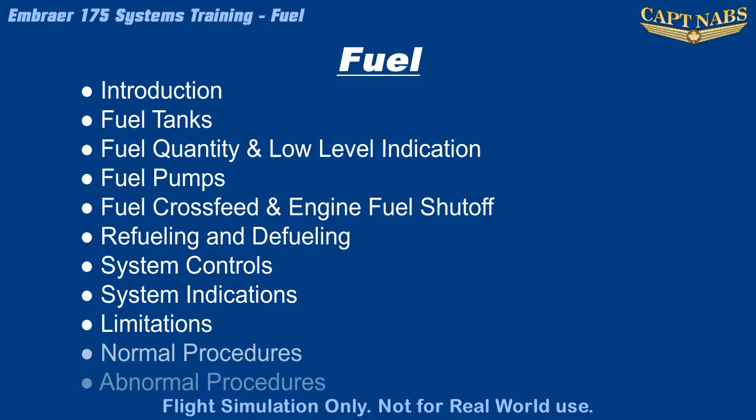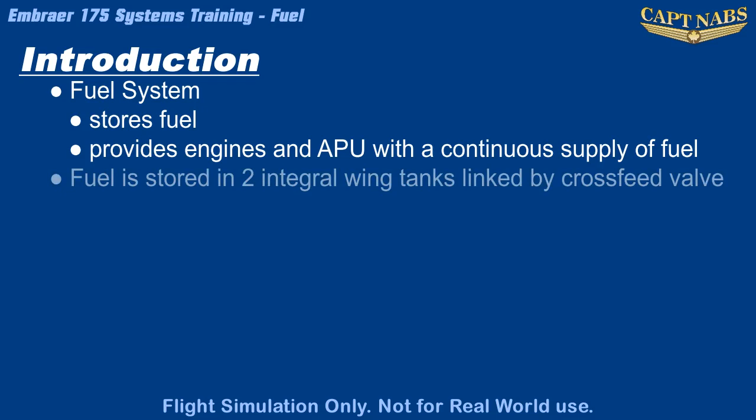The purpose of the fuel system of the Embraer E-jets is to store fuel and provide a continuous supply of fuel to the engines and the APU. Fuel is stored in two integral wing tanks that can be linked via a crossfeed valve. Additional plumbing provides tank venting and allows tank filling as well as ensuring fuel supply to the engines themselves. Overall, the fuel system is quite simple and is designed to operate fully automatically without pilot input under normal conditions.

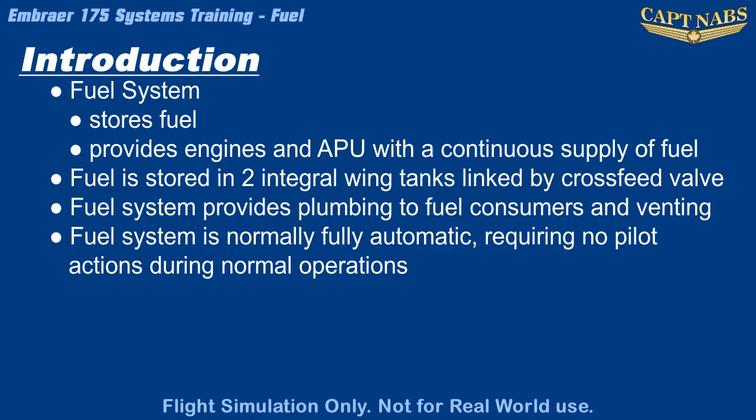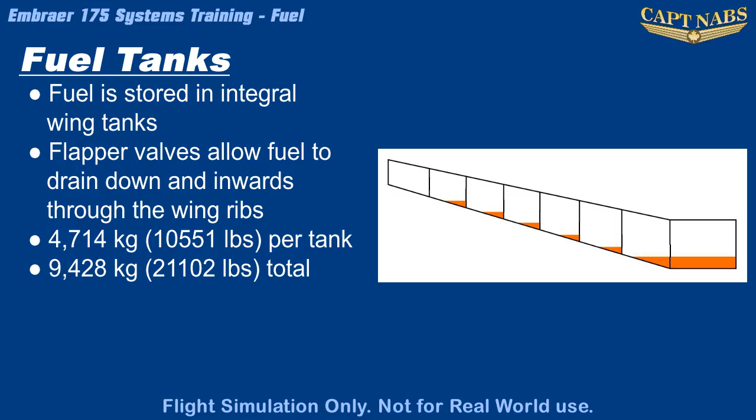Fuel in the Embraer is stored in an integral tank in each wing. Fuel flows through the tank between the ribs that frame the wing's shape. The ribs help partition the fuel in the tank to prevent fuel from sloshing around, and flapper valves within the wing ribs permit fuel to flow downhill towards the wing root as fuel is consumed. The maximum quantity of fuel within each tank is 4,714 kilograms, or 9,428 kilograms total between both tanks.

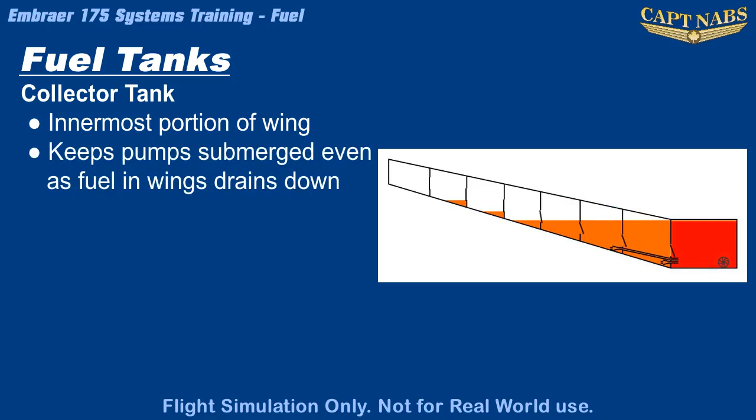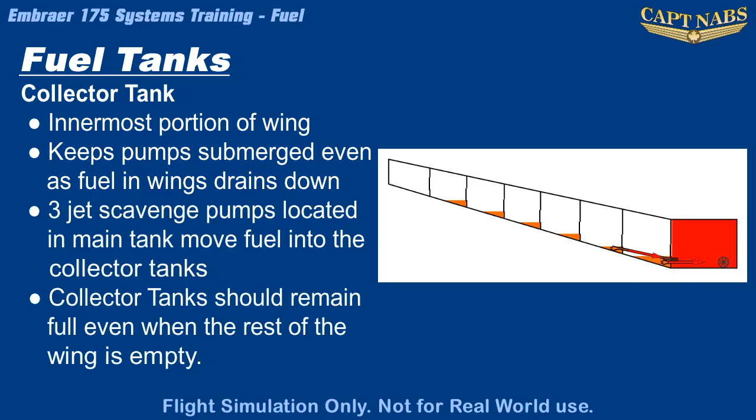Within each tank are several specific compartments, a collector tank and a surge tank. The collector tank is the innermost area within the wing tank. It is designed to keep the fuel tank pumps always submerged in fuel, even as the fuel level in the wings overall falls below the level of the pump. 3 jet scavenge pumps located in the main parts of the fuel tank gather fuel from the main tank and move it into the collector tank, ensuring the collector tank remains full even when the rest of the tank has been drained. The surge tank is an extra tank outboard of the main portion of the fuel tanks.

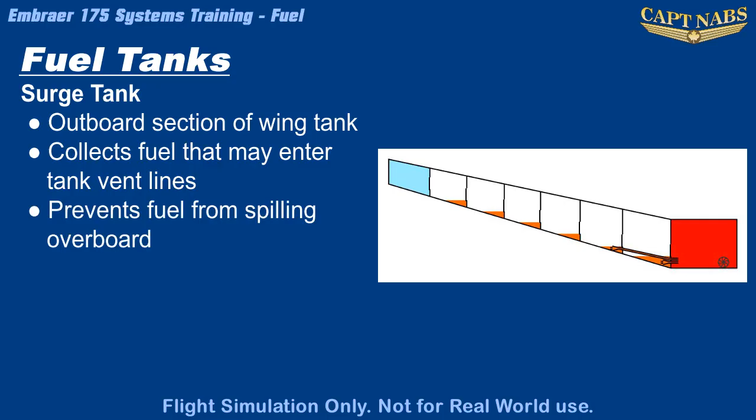It collects fuel that may enter the tank vent system during wing down or other uncoordinated maneuvers. This helps prevent fuel spilling overboard. This fuel can then drain back down into the main tank through flapper valves as fuel in the main tank is used up.

A vent system ensures air can enter or leave the fuel tanks as the fuel quantity changes and also as the outside air pressure changes. This prevents structural failure from excess pressure differential between the inside and outside of the tanks. The vent lines run along the top of the tank, linking various tank sections together with the surge tank. The surge tank is then vented from the top to the outside atmosphere through NACA anti-icing vents. The vent lines are sufficient for all normal operations, but an additional high-capacity pressure relief valve is also provided to prevent overpressurization in case of line blockage.

2 water drain valves are mounted at the low points in each tank where water will collect, as the water is heavier than fuel. Each tank is designed to normally feed the engine on its corresponding wing, with the APU being fed from the fuel line in the right tank.

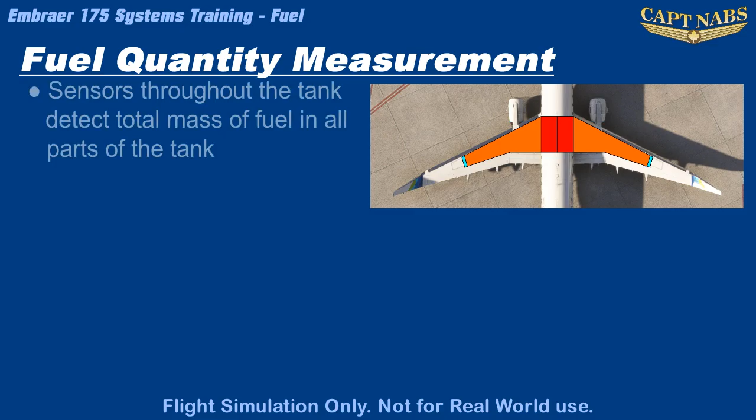Normally, fuel is measured through a series of sensors located throughout the tank that can detect the total mass of the fuel within the tank. This information is transmitted to the EICAS to be displayed as a fuel quantity. The quantity is accurate to within 2% of the indicated value plus 0.75% of the total tank capacity.

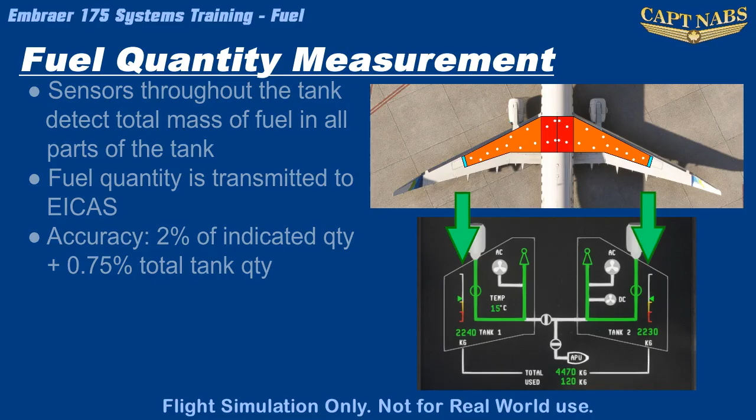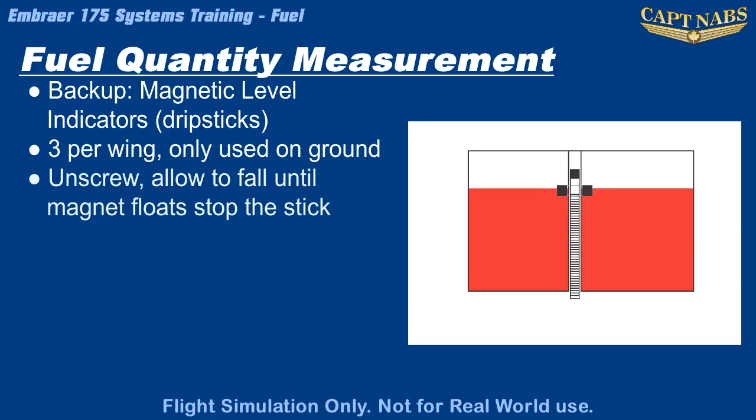In case of failure of the electronic quantity measurement system, 3 magnetic level indicators, also known as dripsticks, are mounted within each wing. These can be used while on the ground to determine the level of fuel in the tanks. The indicator is unscrewed and allowed to fall freely until stopped by magnets floating within the tank. The level is then read where the stick protrudes from the wing and translated into a quantity using a table provided in the AOM fuel servicing section.

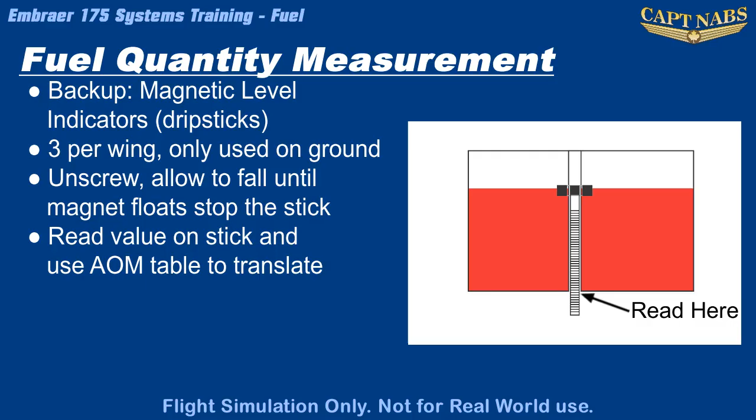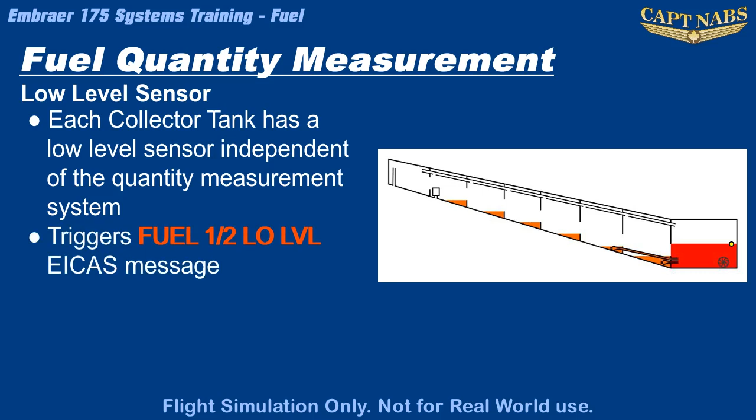An additional independent low-level sensor is installed in each collector tank. This sensor is independent of the fuel quantity indication system, and when the fuel falls below the level of the sensor, the fuel low-level EICAS warning is triggered for the corresponding tank. Under normal conditions, this sensor is activated when the fuel level in the wing tank is approximately 300 kilograms.

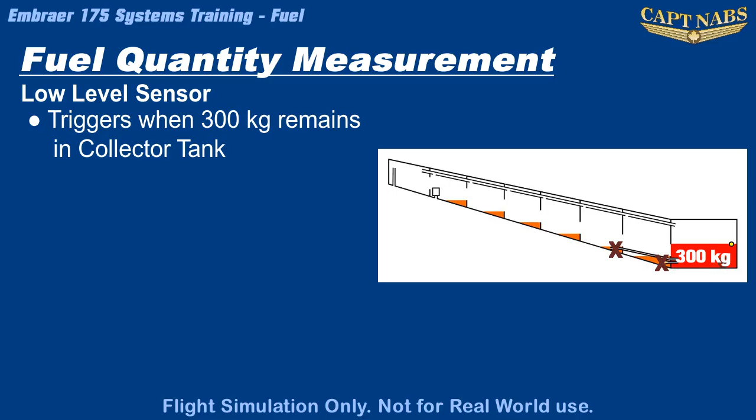Under normal conditions, the scavenge ejector pumps would make sure that all of this remaining 300 kilograms is in the collector bay. However, if some or all of the scavenge ejector pumps are not working due to a malfunction or a lack of return fuel pressure during an engine failure, there will be much more fuel left in the tank outside the collector bay. In this case, the fuel 1-2 low-level warning will trigger with up to 1,800 kilograms still in the tank. If this has occurred, it is possible for the engines to flame out due to a lack of fuel being delivered from the pumps.

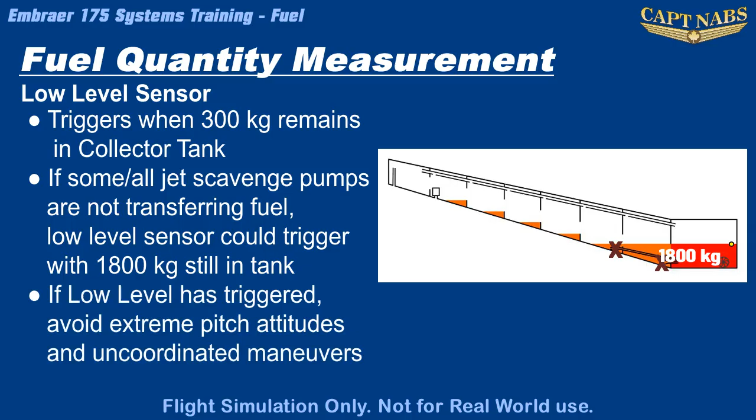If the aircraft exceeds a pitch of 15 degrees nose up or down, any uncoordinated maneuvers, or negative Gs.

Several different fuel pumps move fuel around the system to maximize system reliability. These include one ejector fuel pump per wing, 3 scavenge ejector pumps per wing, one AC electric fuel pump per wing, and one DC electric fuel pump in the right tank only.

The ejector fuel pump is the primary pump that transfers fuel from the collector bay to the engines. An ejector pump is a simple system with no moving parts. It is basically a venturi: a small volume of high-pressure fuel returned from the engine's high-pressure fuel pumps passes through the venturi. The high speed of the fuel decreases its pressure, and this lower pressure sucks a larger quantity of fuel from the tank into the venturi, carrying this high volume of low-pressure fuel to the engine. This simple design requires no electricity, ensuring a continuous supply of fuel even in the event of electrical failures.

3 more ejector pumps, called scavenge ejector pumps, move fuel around the wing fuel tanks. They function in exactly the same manner as the primary ejector fuel pump and are powered by the same high-pressure fuel being returned from the engine. However, the function of the scavenge ejector pumps is simply to move fuel from low areas in the main parts of the wing tank into the collector bay. These pumps ensure the collector bay is always full of fuel, even as the rest of the tank level drops, ensuring the primary ejector pump and the electric pumps always have fuel, even when the aircraft attitude changes.

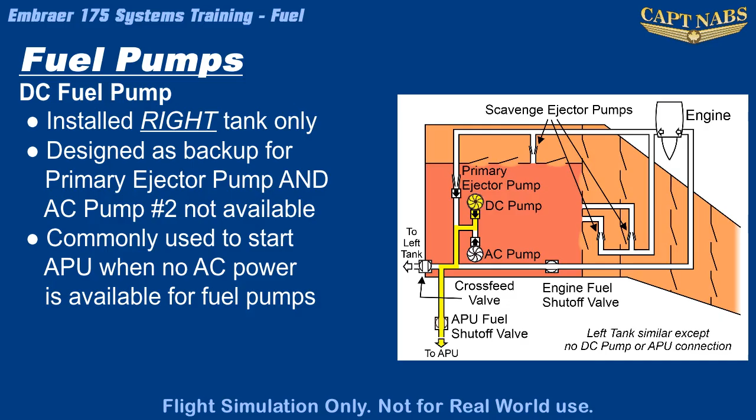A DC fuel pump is installed in the right tank only. It is designed as a further backup in case the ejector fuel pump is not available, for example the engine is off and no AC power is available. The most common time the DC pump runs is to start the APU when no AC power is available and only DC battery power is available. However, the DC pump could also be used to start an engine if an AC pump is not available, though its output is smaller than the AC pump output. The DC pump is powered by DC Essential Bus 2.

Normally, the fuel system is separate for each side of the airplane. However, crossfeed does link the two systems after the ejector fuel pumps and electric fuel pumps. The valve that links the two sides of the system is normally closed, but can be opened to feed both engines from a single tank when necessary to correct a fuel imbalance, especially during single-engine operations.

When the crossfeed knob is selected to the Low 1 position, the crossfeed valve opens and AC pump 2 is activated to increase the pressure coming from the right number 2 fuel tank. This will force more fuel from the right tank through the system to both engines.

Since the fuel pumps always supply more fuel to the engines than necessary, some of the fuel will be returned by the engine to its respective tank, and the fuel level in the low tank will actually rise very slowly. For example, if engine 1 is being fed from tank 2, the excess fuel from engine 1 is still returned to tank 1, so tank 1's level will actually rise slightly.

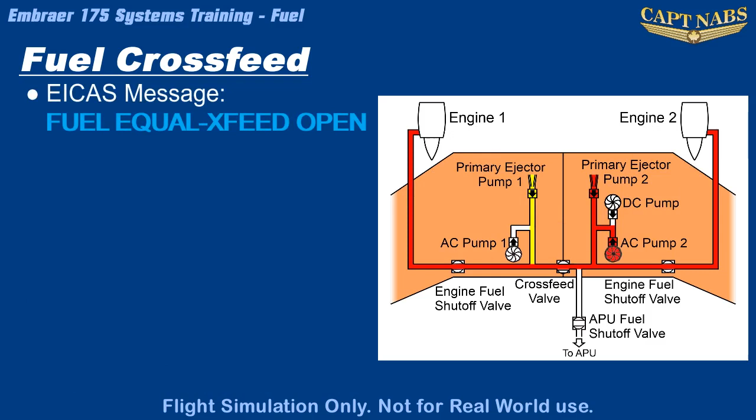Note that an EICAS message, fuel equal crossfeed open, will appear anytime a fuel crossfeed is commenced before the fuel imbalance message is triggered. This message is information only, but serves as an important reminder, as fuel crossfeed can introduce an imbalance beyond limits after only a few minutes if it is not carefully monitored.

The engine fuel shutoff valve is located within the wing, in the feed line from the pumps to the engine. This valve is only closed by pulling the engine fire handle. Since the valve is in the wing, when it is closed during an engine fire scenario, no fuel can enter the wing nacelle area at all.

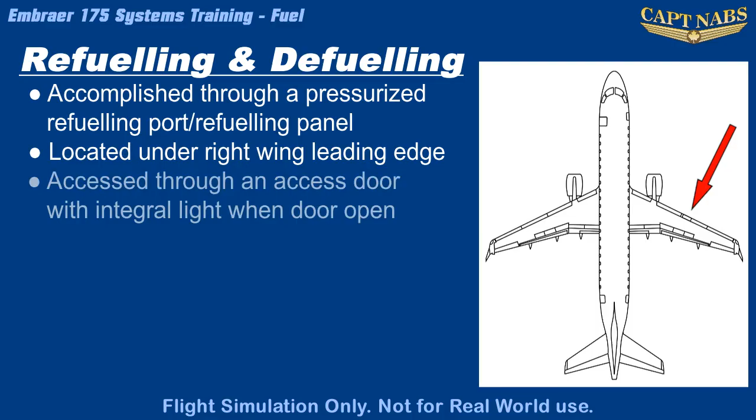Refueling and defueling is normally accomplished through a single pressurized refueling port, located on the refueling panel underneath the leading edge of the right wing. An access panel protects the refuel panel and maintains wing aerodynamics. When the panel is opened, a light illuminates automatically to assist in night and low light operations.

Power to control the refueling system can be provided by DC bus 1 and 2 if the aircraft has AC power available, or the hot battery bus 2 if the aircraft is unpowered.

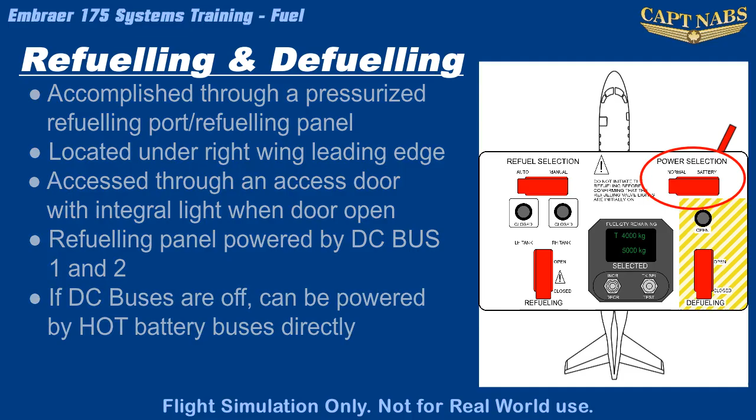Fueling is controlled by a fuel control unit, or FCU. Normally, refueling is conducted in auto mode. In auto mode, personnel pre-select a desired fuel quantity to fill the tanks on the refueling panel.

In this mode, the FCU opens the refuel shutoff valves and monitors the fuel quantity throughout fueling. When a tank has reached a level equal to half the total desired fuel, the FCU closes the tank's refuel shutoff valve. This ensures the correct amount of fuel is delivered and balanced equally between both wings.

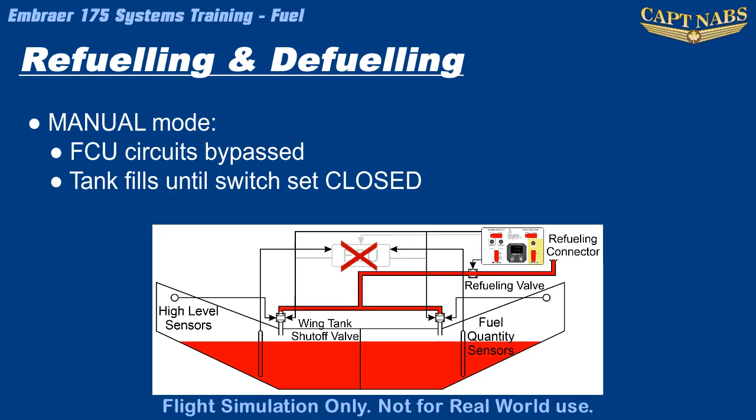In manual mode, the FCU is bypassed. As long as the refueling switch is open, the refuel shutoff valves also remain open. Personnel must manually move the refueling switch to closed when the desired fuel level is reached to close all the refueling valves.

For either mode of pressurized refueling, a high-level shutoff trigger will close the refuel shutoff valves when the fuel in a given tank exceeds the maximum volume. This is indicated by the valves closing and a STOP L OVER or STOP R OVER message appearing on the refueling panel display.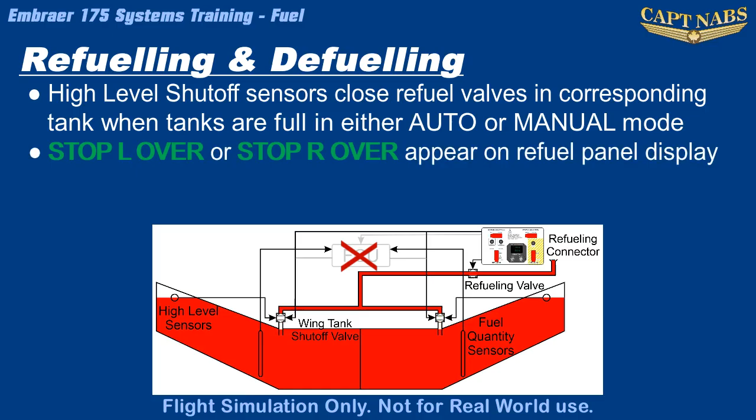Note that it is possible for this high-level shutoff to trigger prior to reaching the nominal tank capacity of 4,714 kilograms. This would usually occur on a warm day when the fuel is less dense, as the high-level shutoff triggers when the tank reaches full volume, regardless of the actual mass of the fuel in the tank.

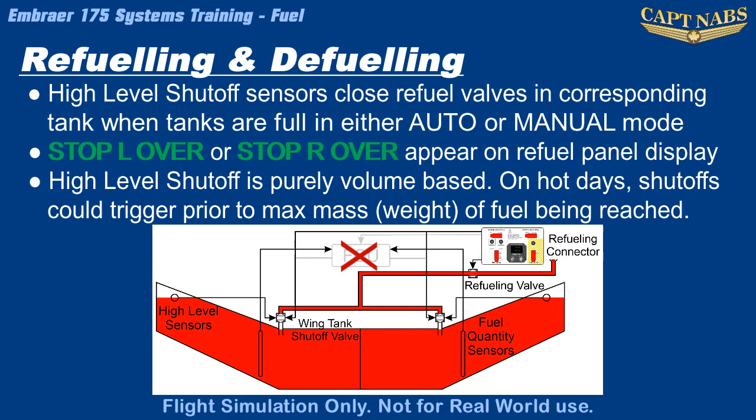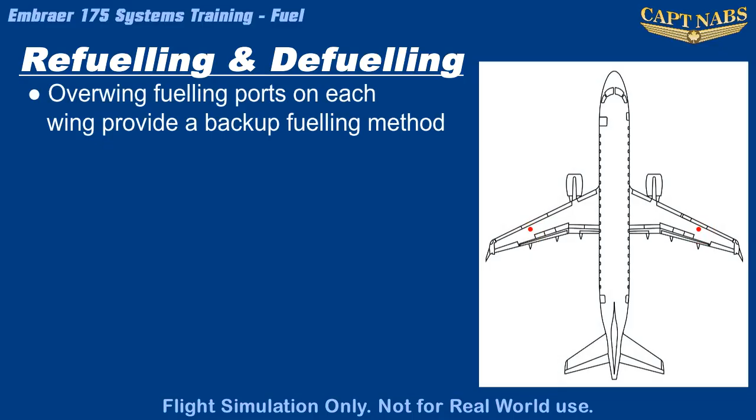It is not possible to bypass the high-level shutoff through pressurized refueling. As a backup, the aircraft is also equipped with a single over-wing refueling port on each wing. However, these are seldom used in reality.

The aircraft can be defueled, if required, through the same refueling panel. A defuel switch allows fuel from the tanks to exit through the pressure refueling port, and this can be achieved either through suction from the defueling vehicle or with the assistance of pressure from the aircraft's fuel pumps.

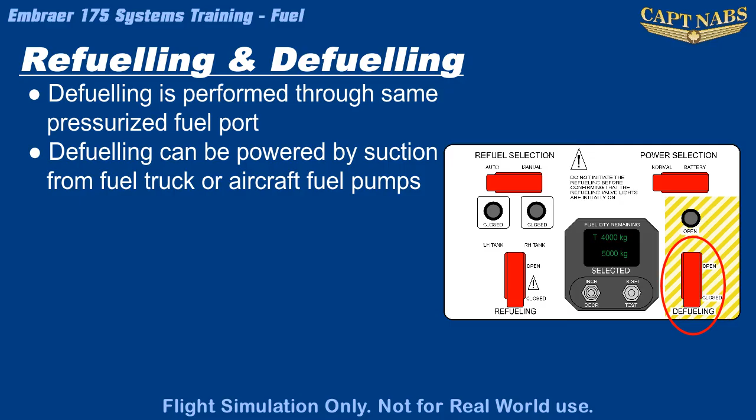The fuel system is primarily controlled from the fuel panel on the overhead panel. This panel is laid out in a diagram which basically resembles the layout of the key components of the system. As you will see, the controls are very simple and, under normal operations, are not operated by the pilots, as the system is fully automatic.

At the bottom of the panel are two AC pump switches, for pump 1 and 2. Normally, these are left in auto mode at all times. The pumps will be activated automatically by the system when needed.

This includes during engine starts, anytime pressure from the ejector fuel pumps is insufficient, during APU operation for the right AC pump, and during a crossfeed operation, where the source tank pump will operate to boost pressure from the source tank.

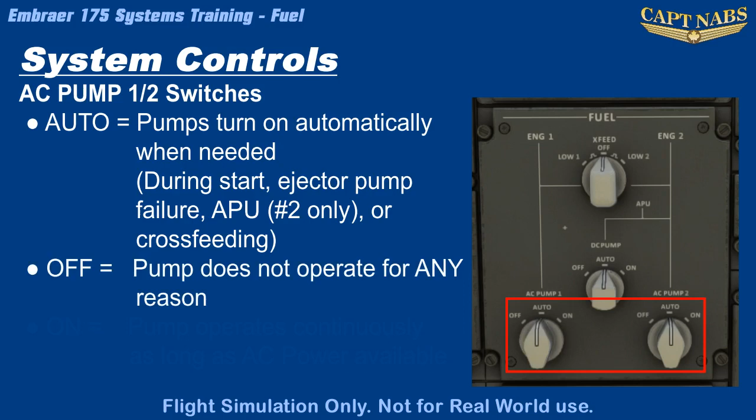In off mode, the AC fuel pump will not operate for any reason. In on mode, the AC fuel pump will operate continuously until another switch position is selected or AC power is removed.

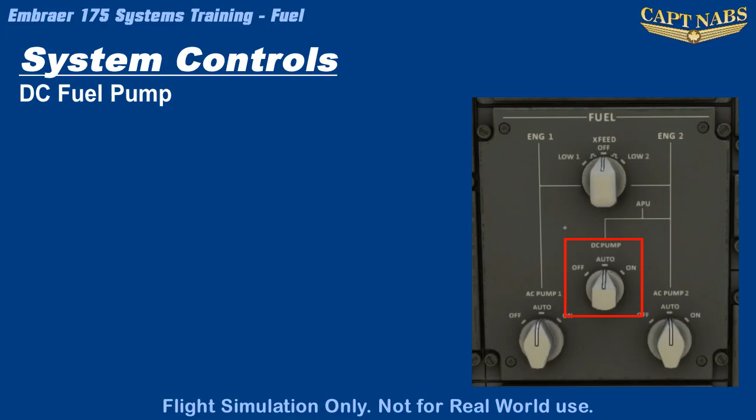A DC fuel pump switch in the center of the panel works in much the same way as the AC pump switches. In auto mode, the DC pump will be activated when fuel pressure is required from the right tank and AC power or AC pumps are not available.

This is primarily the case for APU starts from batteries. The off position prevents the DC pump from operating for any reason, while the on position forces the DC pump to run continuously.

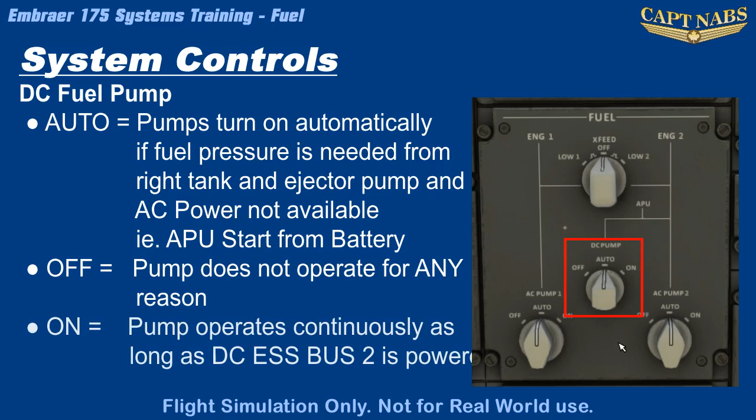At the top of the panel is the crossfeed selector. Normally it is in the center off position, where the crossfeed valve is closed and no crossfeed operation takes place.

The low 1 position is used to provide crossfeeding where tank 1 has a low fuel level. For low 1, the crossfeed valve opens and the right AC pump is activated, assuming it is in automatic mode. This increases pressure output from tank 2, forcing fuel from tank 2 into both engines and ensuring its level drops faster than tank 1.

When low 2 is selected, the crossfeed valve again opens, but this time AC pump 1 is activated, reversing the process.

The other controls for the fuel system are located on the refueling panel underneath the right wing. The refueling switch controls the position of the refueling valve behind the pressurized refueling port. Open, the port is opened and refueling can commence. Closed, the refueling valve is closed.

Above the refueling switch are two lights that indicate the status of the refueling shutoff valves. When the valves are closed, the lights illuminate.

Above this is the refueling mode selector, which is normally guarded in auto mode. In auto, the refuel shutoff valves close automatically when the pre-selected fuel level is reached in the tank.

In manual mode, the refueling shutoff valves remain open as long as the refueling valve is open, unless the high-level shutoff triggers to close a refuel shutoff valve.

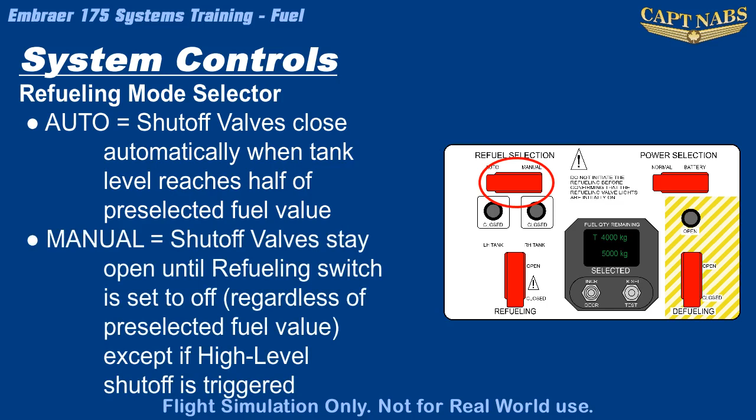The power selection switch allows personnel to select a power source for refueling operations. In normal, guarded mode, the refueling system operates off the aircraft's electrical buses, specifically DC Bus 1 and 2. However, if aircraft power is not available, battery mode can be selected. In this case, all the refueling system runs off battery 2 through the Hot Bat Bus 2. Be sure not to leave the switch in battery mode when refueling is complete to avoid excess drain on the batteries.

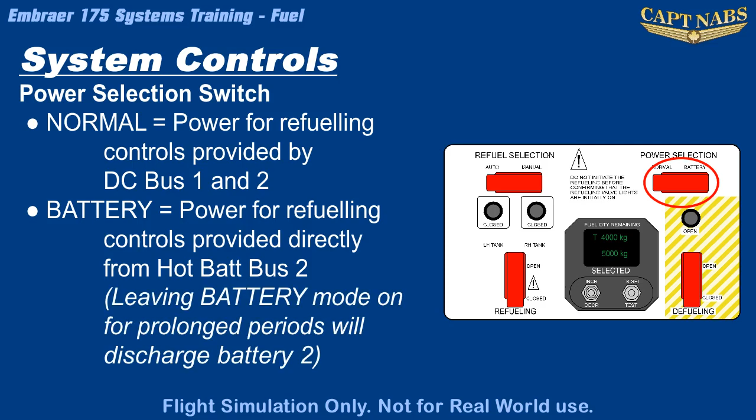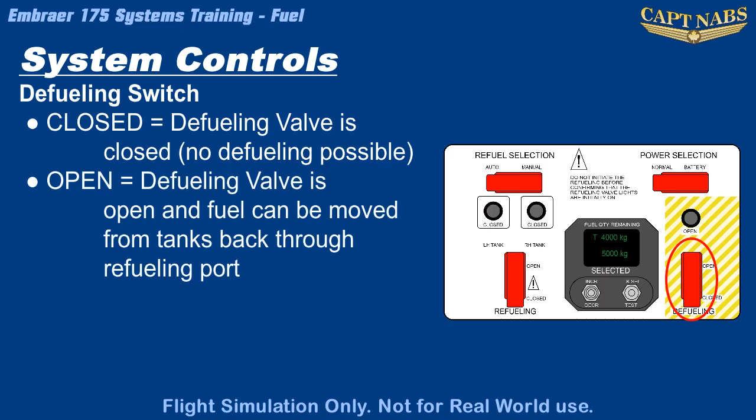The defueling switch has two positions. Closed, the defueling valve is closed. Open, the defueling valve is opened, and fuel can move from the tanks back through the refueling port to allow defueling. The defueling light will also illuminate while the valve is open.

The display shows the fuel quantity in the tank on the top line and the pre-selected fuel quantity on the bottom line. Moving the increase-decrease spring-loaded switch will increase or decrease the pre-selected fuel quantity. The other switch on the display is used to control and test the display and is also spring-loaded.

Selecting Tank Sel cycles the upper line of the display. When first powered on, the upper line shows the quantity in both fuel tanks, indicated by a T for total. Pressing Tank Sel once displays the left wing fuel quantity with an L. Pressing it again displays the right fuel quantity with an R, and pressing it again will return you back to the total fuel value. Pressing the test position will test the display system to ensure all the display segments are working correctly.

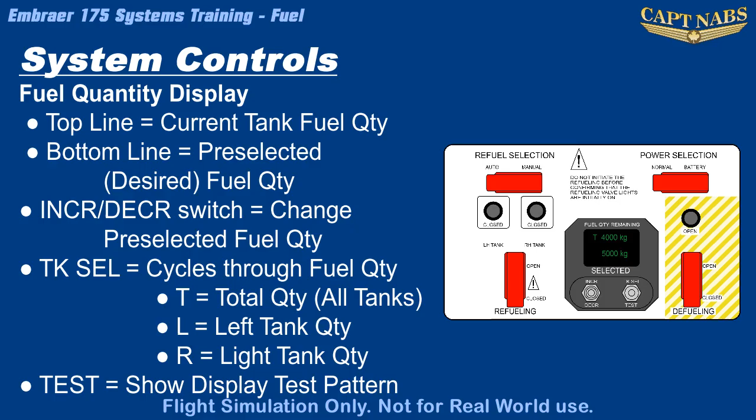It is worth noting an important safety feature of the refueling panel. The guarded switches are in their normal or safe for flight position when the guard is closed, and the design of the access door is such that the door cannot be closed and latched if any of the guards are not in their correct guarded position.

As with most systems on the Embraer, the status of the fuel system can be monitored on a dedicated fuel synoptic page on the MFD. The quantity of each tank is indicated on each tank, both numerically and with an arrow on a tank level scale. The scale indicates a normal, white range, an amber caution range, and a red, low fuel range. The color of the digital readout will also change, with green for normal, amber for caution, and red for low fuel. The total fuel quantity for both tanks is displayed at the bottom of the screen, along with a fuel used indication, and the quantity will change colors in line with the tank indications. The fuel used indication reflects the current flight and resets when the first engine is started.

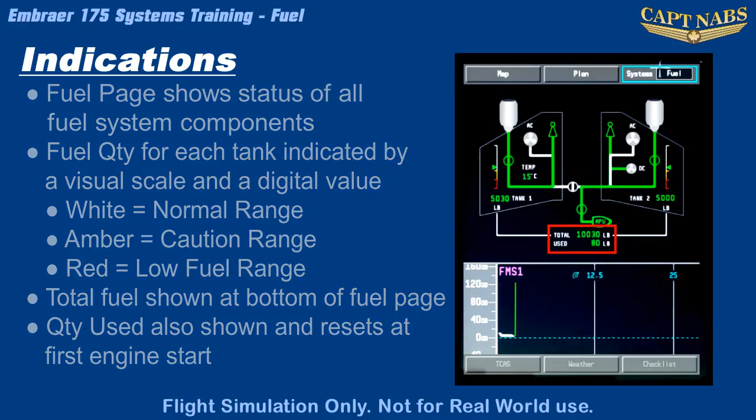Fuel lines are shown linking the various components of the fuel system. The lines display either white if no fuel pressure is present, or green if pressurized fuel is present in the line. This green-white convention also extends to the fuel valve and pump symbols. Note that it is normal for fuel pressure to be low enough to not register and thus be shown as white when engines are still on, but they are running below 60% N2.

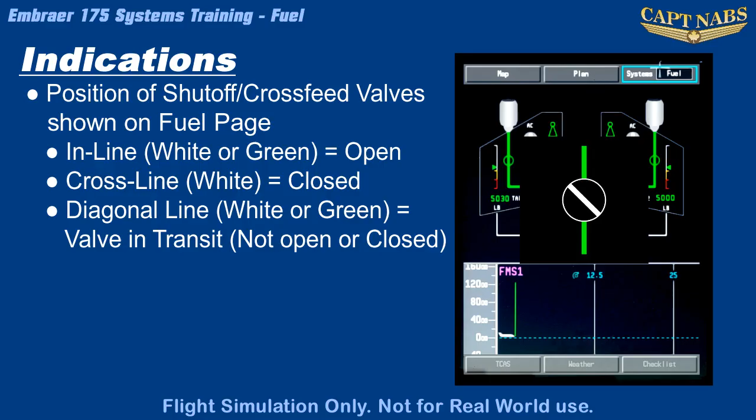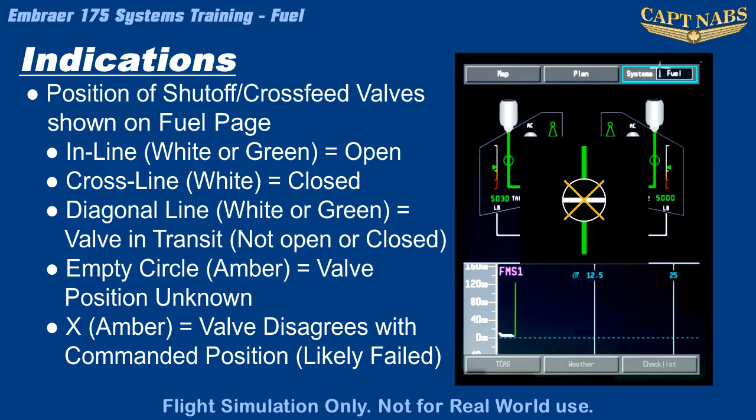The status of all the fuel valves in the system is shown on this screen: the engine shutoff valves, the APU shutoff valve, and the crossfeed valve. A valve that shows an inline flow line is open and may be either green or white depending on fuel pressure. A closed valve will show a cross-line flow that will be white. A diagonal flow line indicates a valve that is in transit, neither fully open nor closed, and may be green or white. An amber circle with no flow line at all indicates the position of the valve is unknown. And a valve with a amber X over it indicates a valve that is open or closed as shown, but its position is not in the commanded position, and it is therefore likely failed in that position permanently.

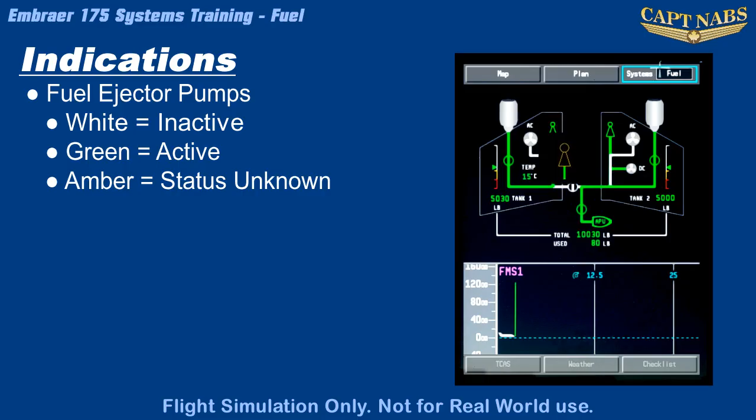All the electric pumps are shown using similar conventions. A pump with a green windmill is on, and a gray windmill indicates off. An amber windmill indicates a pump whose status is undetermined, and an amber X over the pump symbol indicates that the pump is not in the commanded setting and is either failed on or off as indicated by the green or gray windmill.

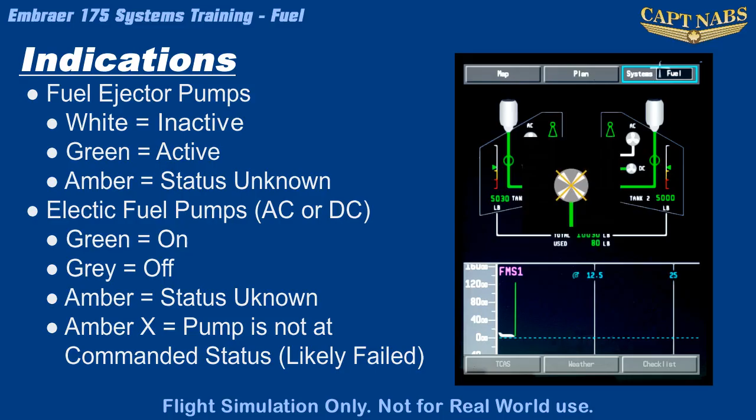The final indication on this screen is a fuel temperature indication. Note the temperature is only measured in the left tank and indicates green for a normal range, amber for a cautionary range, or amber dashes if the information is invalid.

Since fuel is obviously one of the most important parameters of operating an airplane, the fuel quantity is also displayed permanently on EICAS below the engine indications. The indication shows each tank level as well as the total fuel level for the aircraft. Similar to the MFD, the values will change color from green, normal, to amber, caution, to red for low fuel level.

Above the fuel quantity indications, fuel flow indications in kilograms per hour, or pounds per hour if the aircraft is so configured, are shown for each engine. These are either green or amber dashed if no valid data is available.

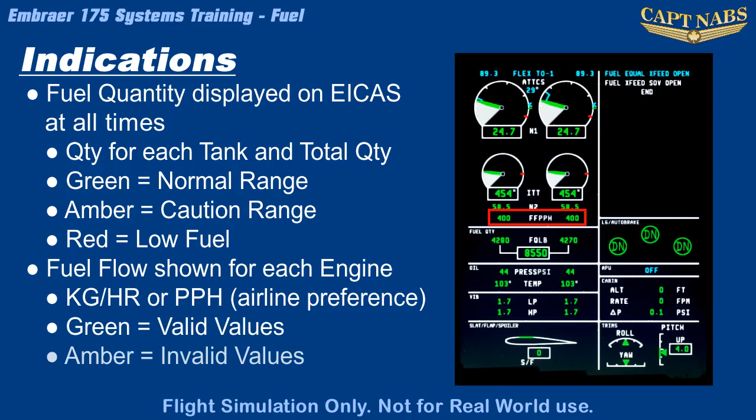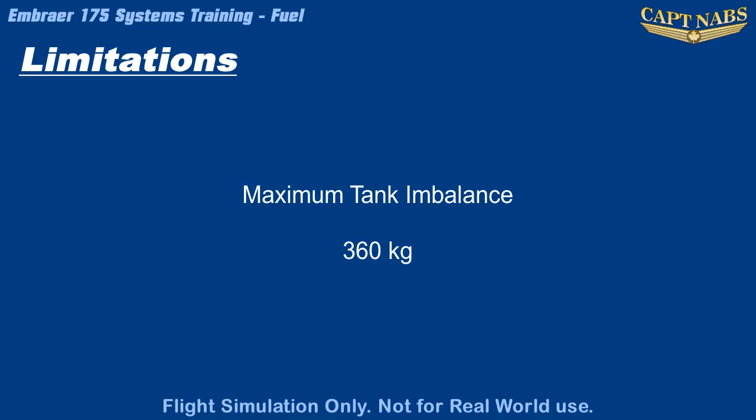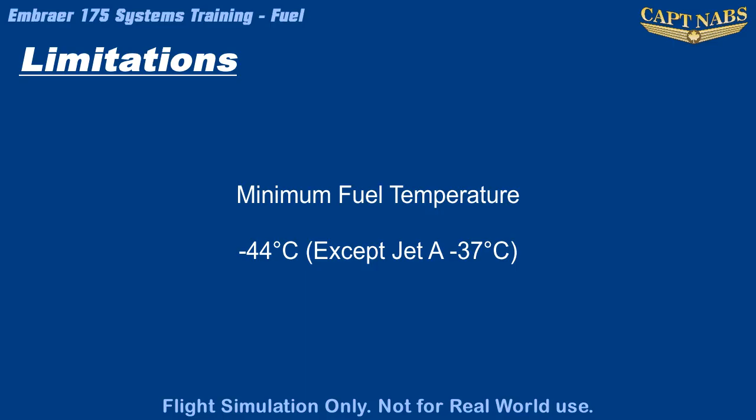The primary limitation of the fuel system is the max tank imbalance, which should not exceed 360 kilograms. The temperature limit for fuel is minus 44 degrees Celsius for almost all types of fuel approved for this aircraft, except for Jet A, where the temperature limit is minus 37 degrees Celsius. The final limitation of the fuel system is that the crossfeed selector must be off for takeoff and landing.

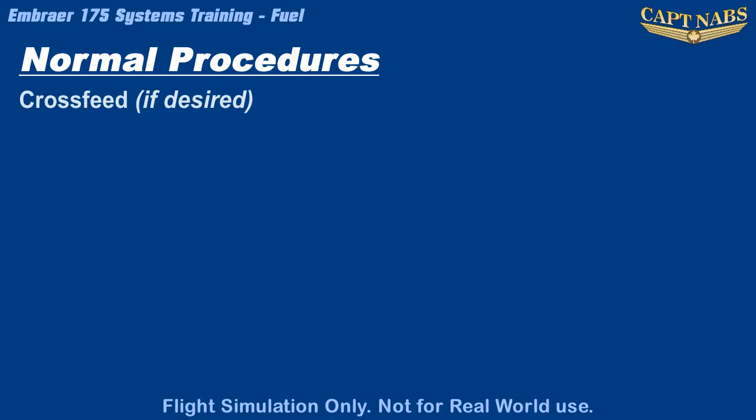Under normal operations, no procedures are required for the fuel system. The system operates fully automatically. The only part of the system that may normally be used during flight is the fuel crossfeed system. If a fuel crossfeed is desired, determine the lower tank and select the crossfeed selector appropriately. Monitor the fuel crossfeed carefully, as it only takes a few minutes for the maximum imbalance of 360 kilograms to be fully equalized at most power settings, and it is very easy to overshoot the target if the crew is distracted by other tasks. When the crossfeed is complete, simply move the crossfeed selector back to off.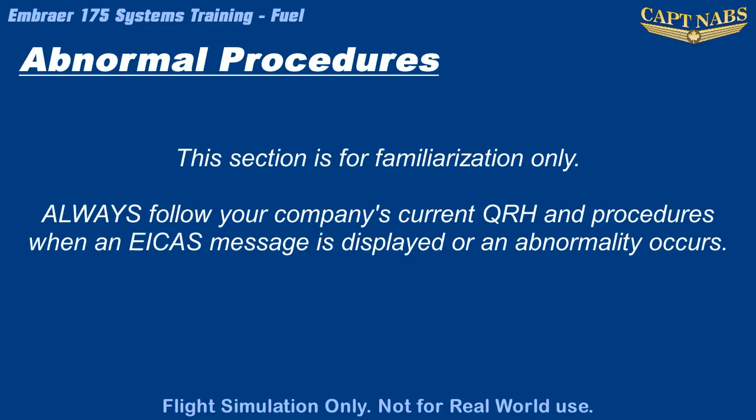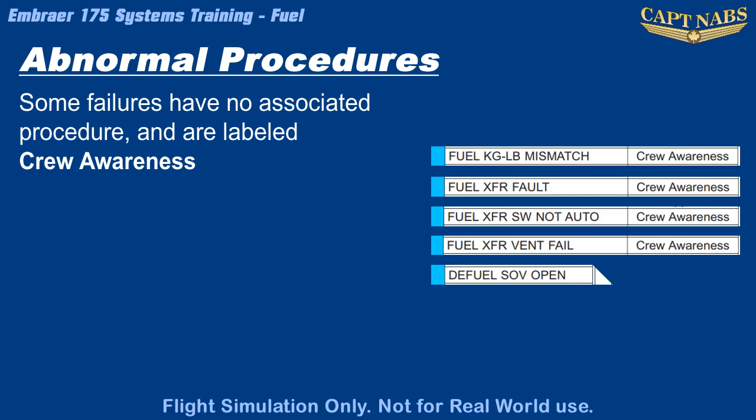We will now discuss some of the failures associated with the fuel system. As always, follow your company checklist and procedures. There are numerous fuel failures that require no pilot action other than considering the future ramifications of the failure. Crew awareness items include fuel kilogram-pound mismatch, fuel transfer fault, fuel transfer switch not auto, fuel transfer vent fail, and defuel shutoff valve open.

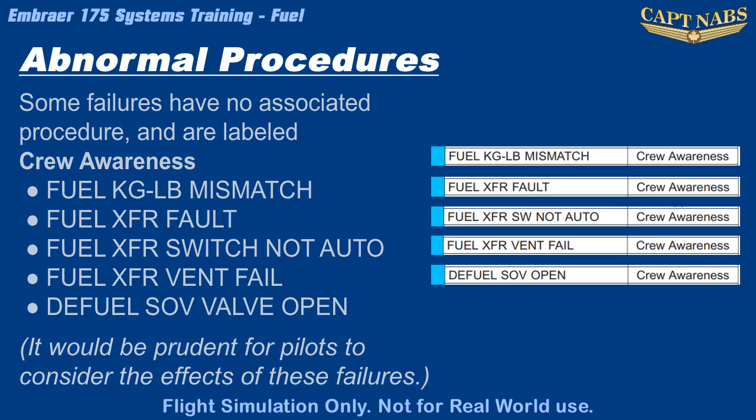If any of the individual fuel pumps fail, they should be switched off to ensure no electricity flows through the failed pump now or later. Sparks from a failed pump in a tank are a very self-explanatory hazard.

If fuel feed 1 or 2 fault appears, there is a problem with the amount of fuel moving through the fuel system. If in flight, continue to monitor all the fuel systems. If on the ground, there is a procedure to increase the pressure in the system by accelerating the engine and activating the AC pump to push more fuel through the system. If this does not solve the issue, maintenance action is required.

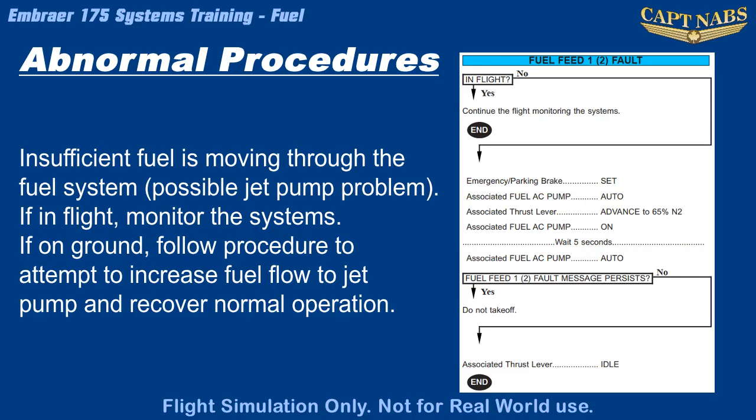If fuel tank low temp displays, the fuel is cold enough that ice crystals forming in the fuel is a possibility. The checklist requests the pilots to accelerate to increase the total air temperature passing over the wings and hopefully heat the fuel. If this proves insufficient, a descent to warmer air should be commenced as soon as possible.

If fuel crossfeed fail displays, ensure the crossfeed selector is off. In case of fuel asymmetry that cannot be rectified, asymmetric thrust might be required.

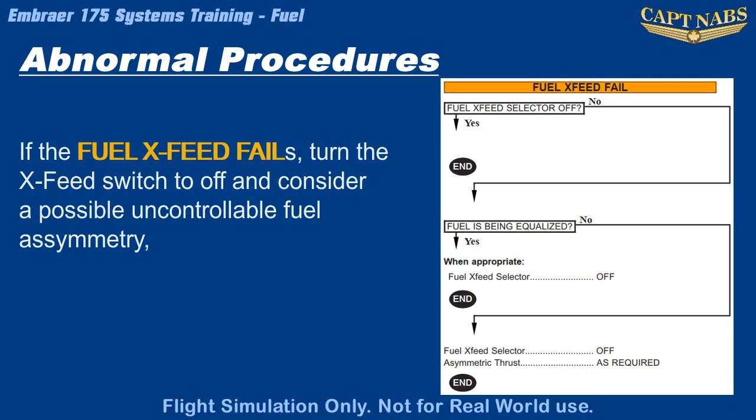If APU fuel shutoff valve fail appears, do not restart the APU. If engine 1 or 2 fuel shutoff valve fail appears and the fire handle was pulled, then the valve has not closed when commanded. Your best bet is to shut off the associated pump and crossfeed to reduce the fuel flow to that engine as much as possible.

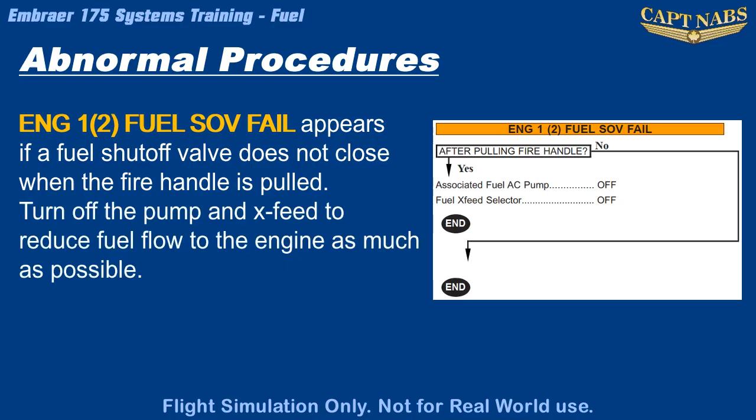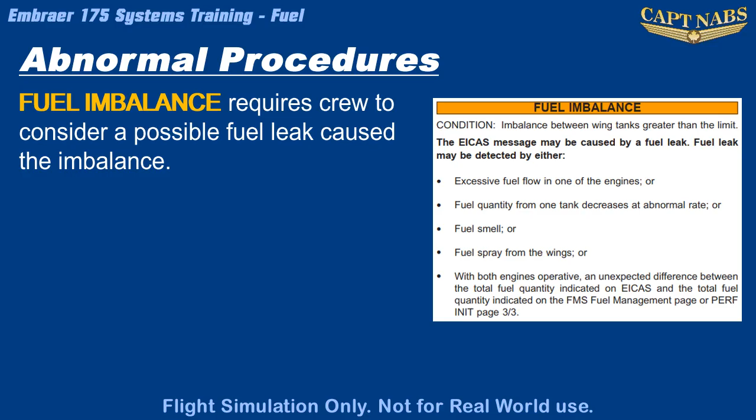If the fuel imbalance message appears in flight, the checklist leads us to evaluate the possibility of a fuel leak. A fuel leak is a critical failure that must be handled carefully to minimize lost fuel. If the crew does not suspect a leak, then crossfeed can be used to restore fuel balance. However, if any doubt exists about whether there might be a fuel leak, do not open the crossfeed valve. Serious incidents have been made much worse in the past by opening the crossfeed valve at an incorrect time.

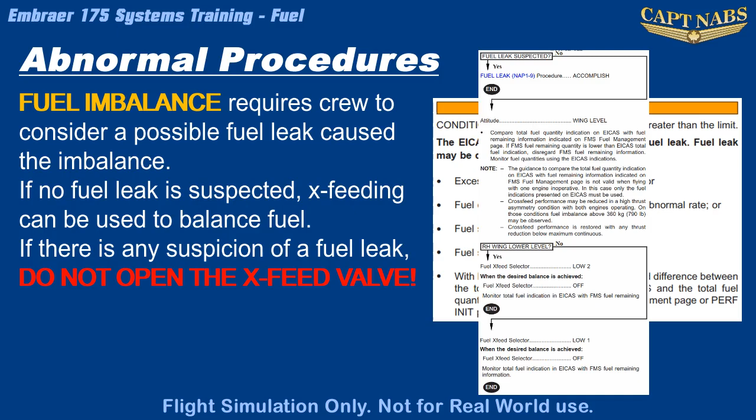A separate checklist exists for a fuel leak that again asks the crew to evaluate the possibility, and if a fuel leak is suspected in the right tank, to turn off the APU in case the APU feed line is the source of the leak. The checklists do not provide additional guidance, however crews must consider diversion and be prepared for an engine flameout when fuel supply in a tank is exhausted.

If it is uncertain if fuel will be sufficient to land with the engine running on the leaking side, preemptively shutting down the engine in flight may be the safer course of action rather than having an engine failure on short final or even during the flare.

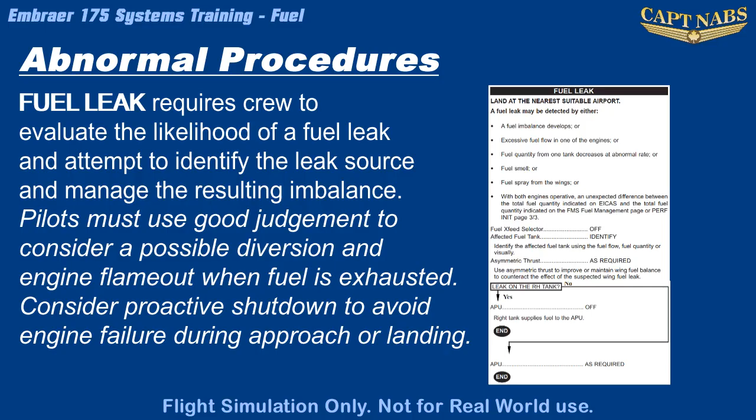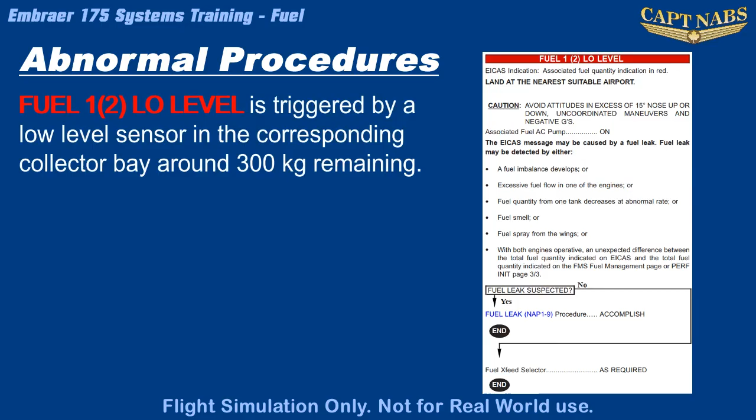The final abnormal for the fuel system is the fuel 1 or 2 low-level warning. If this message triggers, the corresponding AC pump should be turned on to ensure multiple pumps are trying to supply fuel to the engine. Excessive maneuvers and pitch attitudes could cause fuel to slosh away from the pumps and lead to a drop in fuel flow and an engine flameout. When a fuel low-level warning triggers, the aircraft should be landed as soon as possible before these engine flameouts could occur.

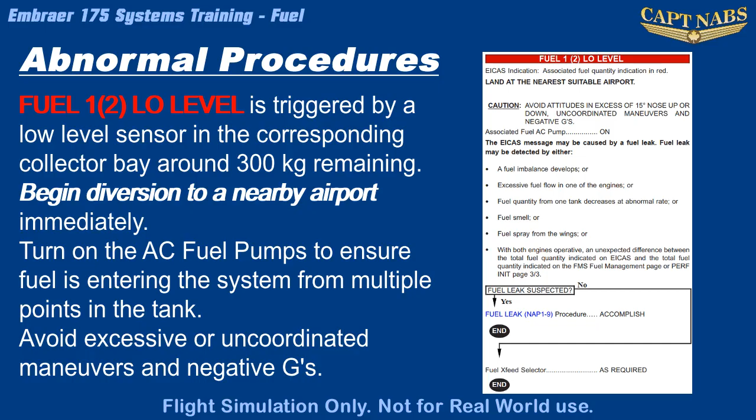We will now answer some review questions regarding the material covered in this presentation. Try to answer the question before the answer is displayed. Pause the video if necessary to give you the time to answer the question. Let's begin.